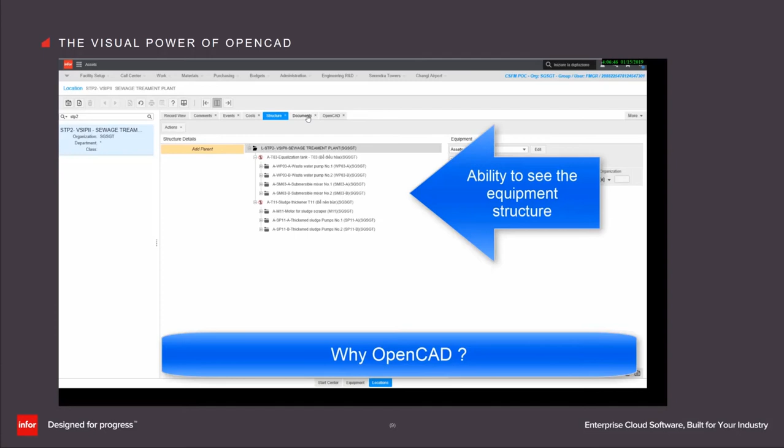Today I'll be focused on OpenCAD first and then on OpenCAD BIM. To start this presentation, I wanted to introduce a very short video about the value of incorporating drawings in EAM in order to locate the asset graphically and to see the work order condition as well. Let's start watching this video, which allows you to understand how easy it is to associate the drawing with your component. OpenCAD uses your AutoCAD drawings as they are.

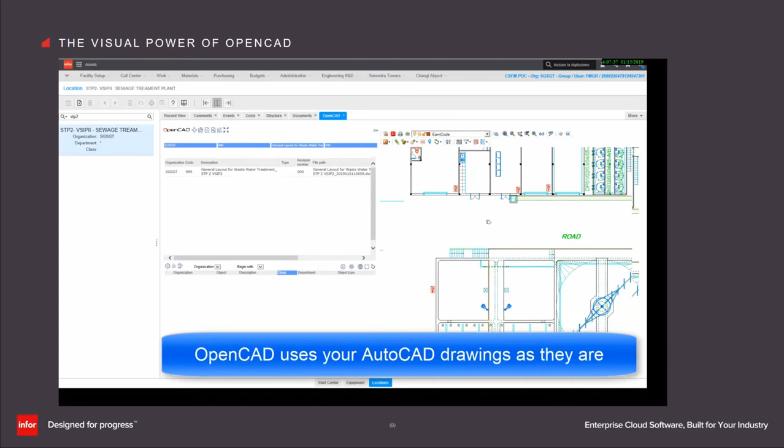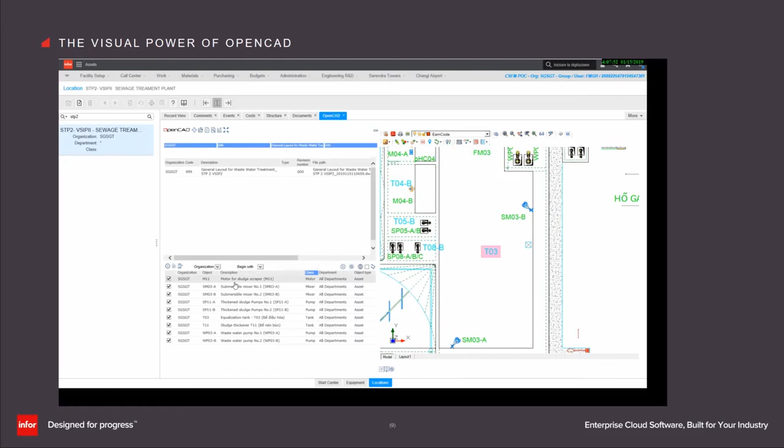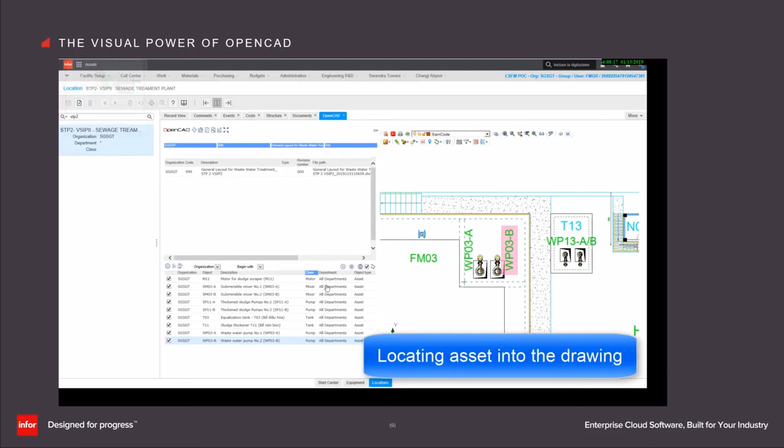Basically you can see the drawing just as having AutoCAD inside EAM. You can also take advantage of tagging your component in the drawing, and then search objects from the EAM database. You can run queries based on EAM data. In this example, you can locate your asset into the drawing, differentiating them based on the EAM classes, for example.

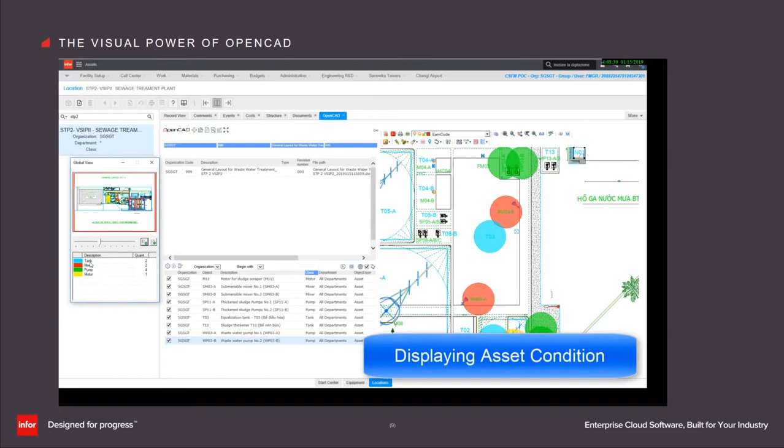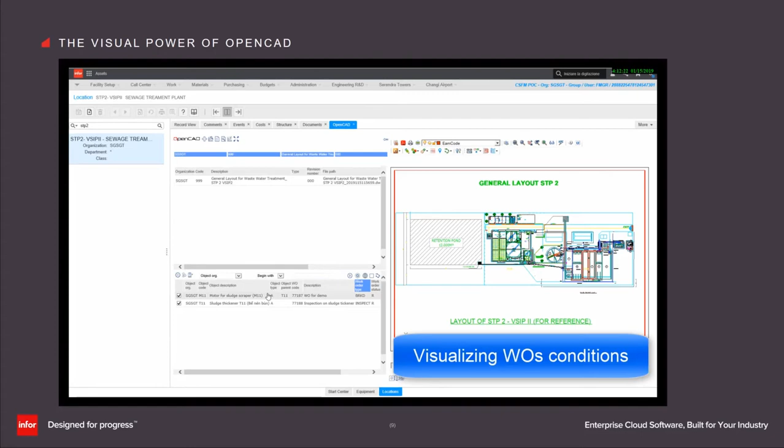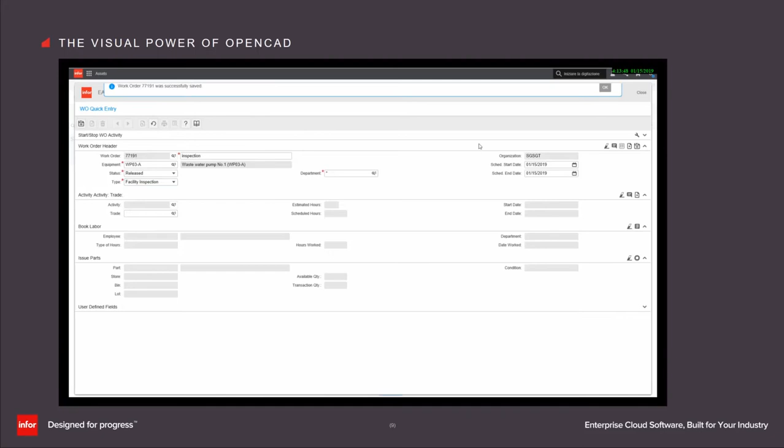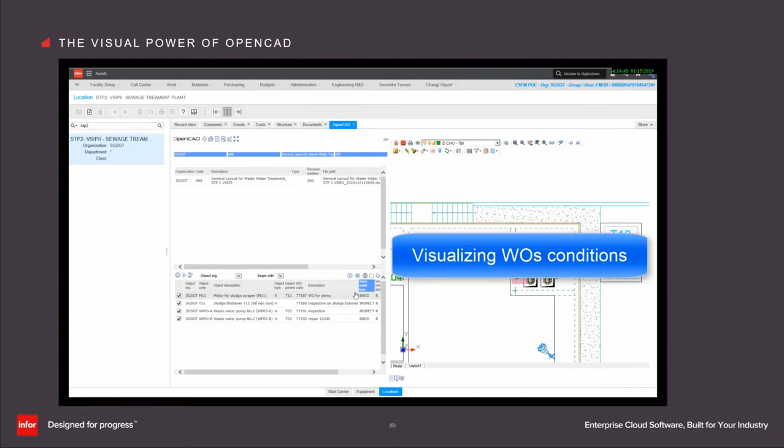This is the display asset condition capability, which allows you to have a color-coded result. Even more importantly, we can use the query for locating work orders, and then easily search certain equipment. You can use the right-click option for creating work orders. As you can see, we created the first work order, and now we're creating a second one with the quick work order way. Those work orders have different work order types, so we're able to display the work order condition, and the two different work order types have been colored differently, which is extremely important for locating your work order.

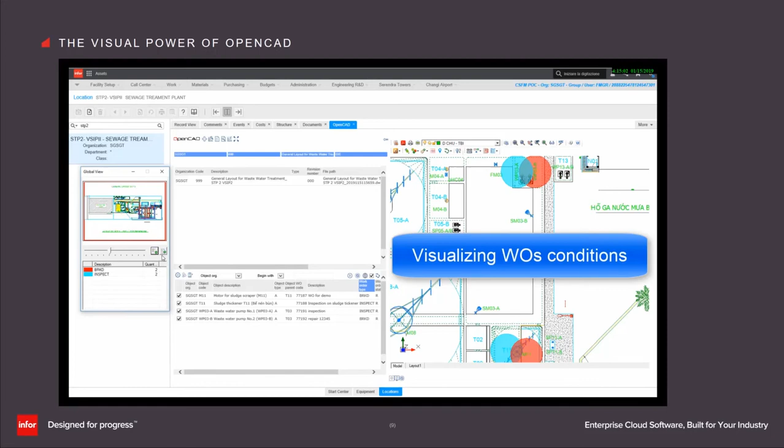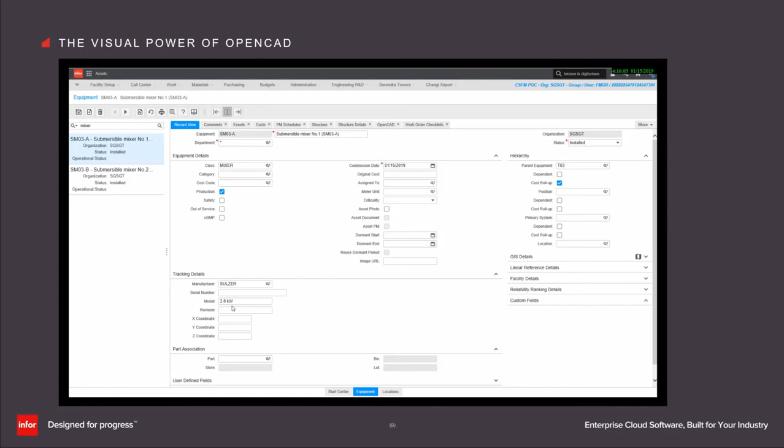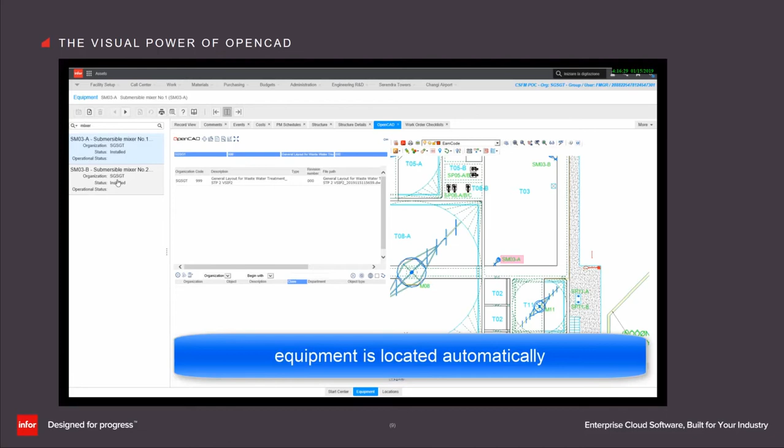Now let's start from an existing equipment. You can understand the data, and by clicking on the OpenCAD tab, you can jump immediately to where the asset is located in your drawing. Let's search for that particular mixer, and you can see where the object is located.

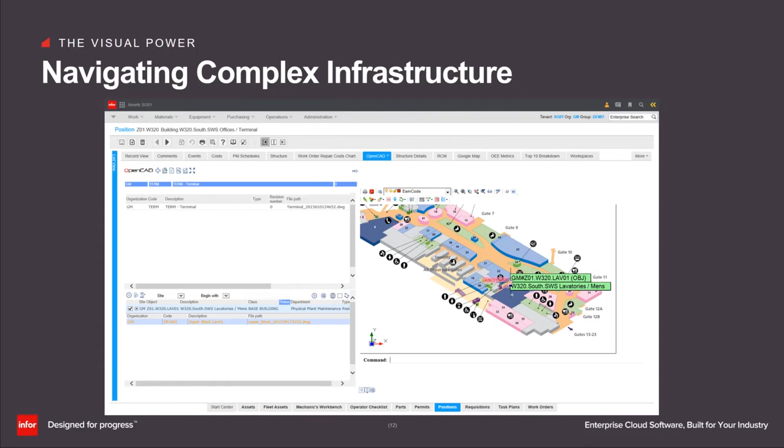So the question is, how does a visual EAM help? I'll go through a few examples to touch base with you guys about the value of having a visual EAM. Navigating complex infrastructure is key, so associating your drawings within EAM and using them for drilling down from the top to the desired equipment is now possible. But again, what about navigating complex assets?

Combining the tabular data of EAM with the visual components of OpenCAD helps bring about the very best in both worlds, such as work transactions, condition data, and inspection.

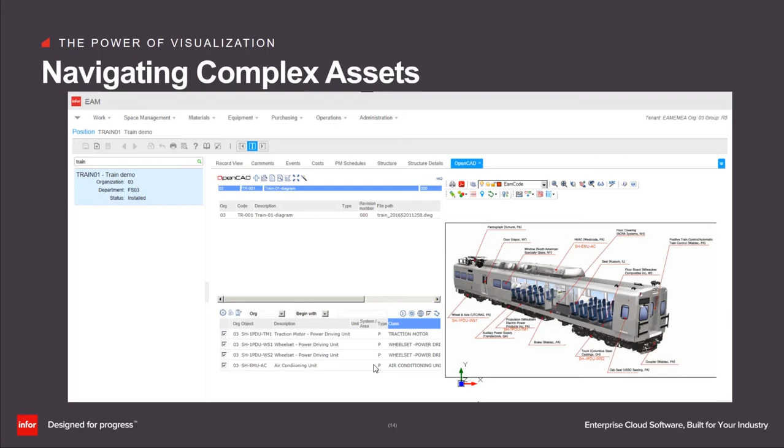It's nice to see that we can visualize quantitative data, like condition ratings, and qualitative data, like survey results, in a drawing, illustrating how we can help customers more intimately understand their aging infrastructure. Finding data built out in EAM, they can be seen in OpenCAD, so the thematic condition of why the equipment is degrading the way it is can be understood.

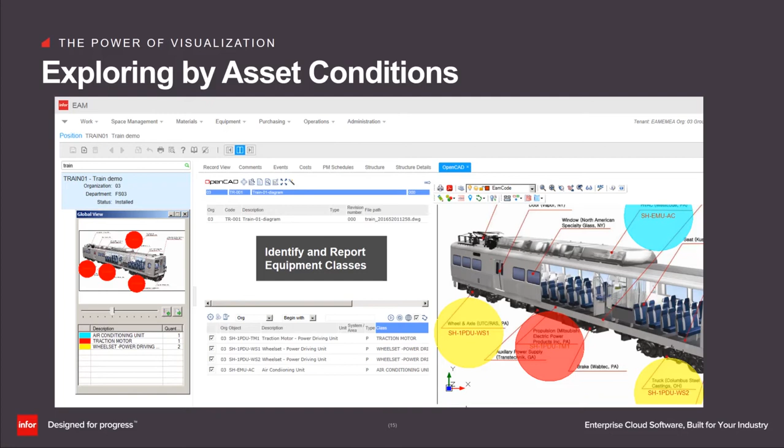Our EAM tracks everything you own, lease, and rent, and makes the data visible to you in different forms. It is really nice and effective, but it can be time-consuming as well. So navigating your facilities from a campus level down to a building floor and then locating the room is now very easy and super fast with EAM OpenCAD.

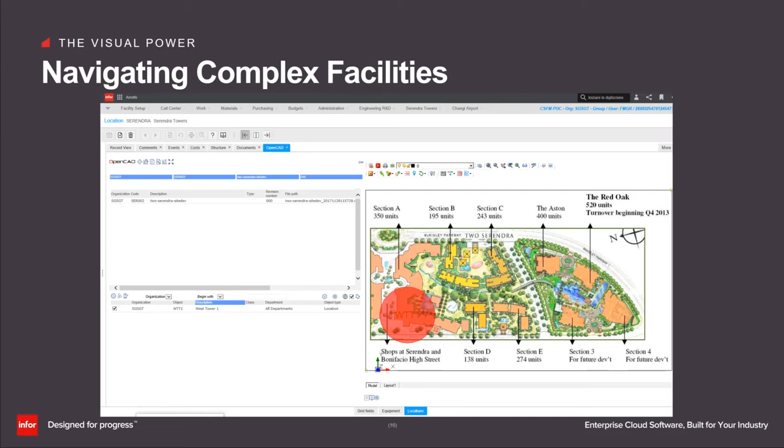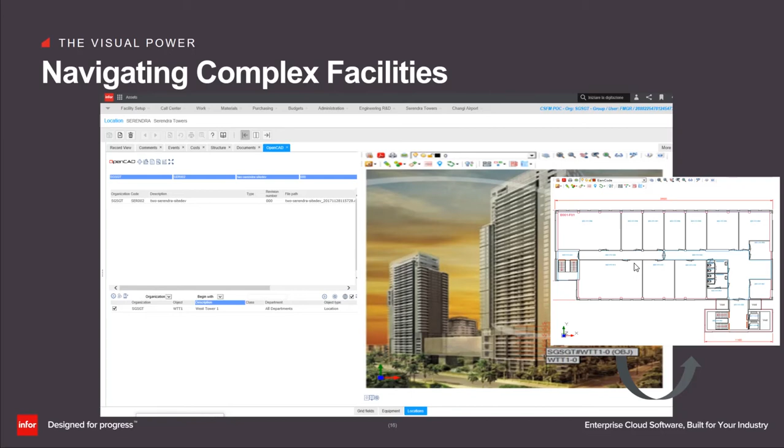If you click on this building circle here, you can jump to the second level of the drawing, which represents the building facade, where you can find the tag for going to the floor plan associated with it. That's the final step of discovering the third level of the drawing and accessing the floor plan you want to explore with EAM.

The benefit of exploring the floor plan graphically is great for different reasons. For example, we can differentiate objects based on any of the EAM data. We can also use the graphic search for locating work orders and then setting the color for displaying a work order condition, as we already saw in the previous example. In both cases, we can print out the result using the PDF report capability of the product.

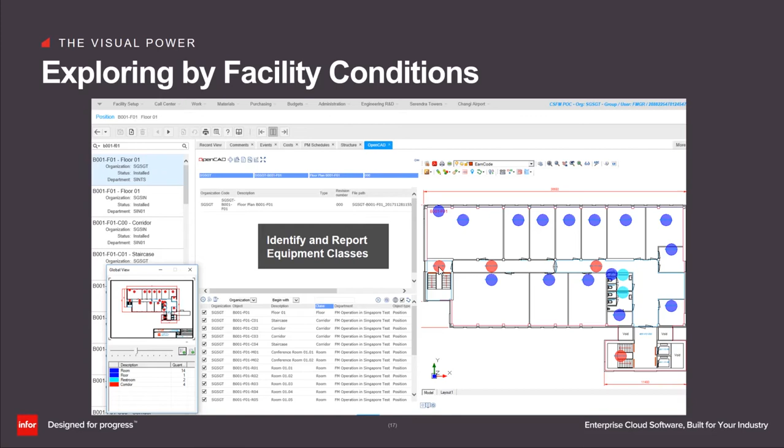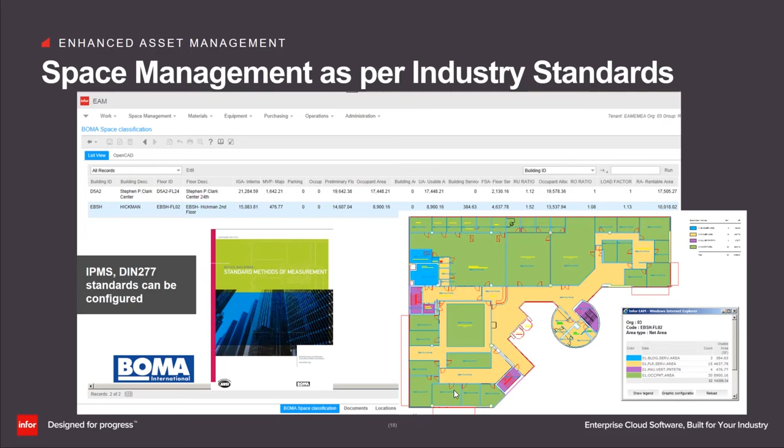Space management is part of the visualization tool, which is extremely important. We can set up and adopt industry standards for measuring office buildings. EAM and OpenCAD can be configured accordingly. It was recently certified by the Facility Management Association in Germany, EAM and OpenCAD together, which is extremely important for us. I'm very happy and proud of that.

Space planning is considered the foundation to initiate the space chargeback strategy. Identifying who occupies a space, or if spaces are empty, is mandatory for managing your buildings more efficiently. Making the result visual helps. Seeing is believing.

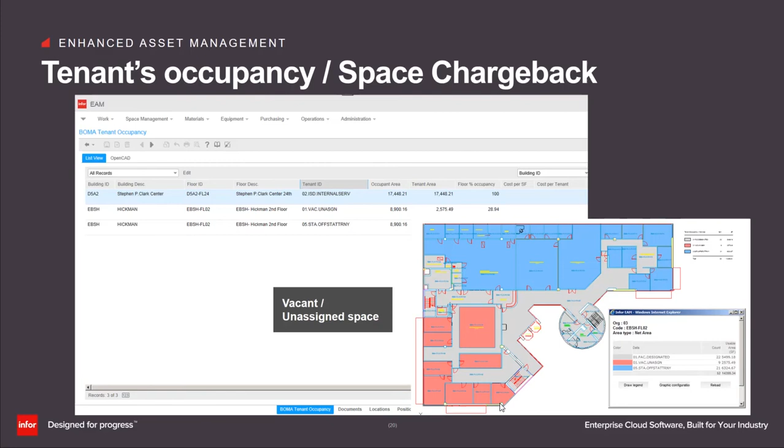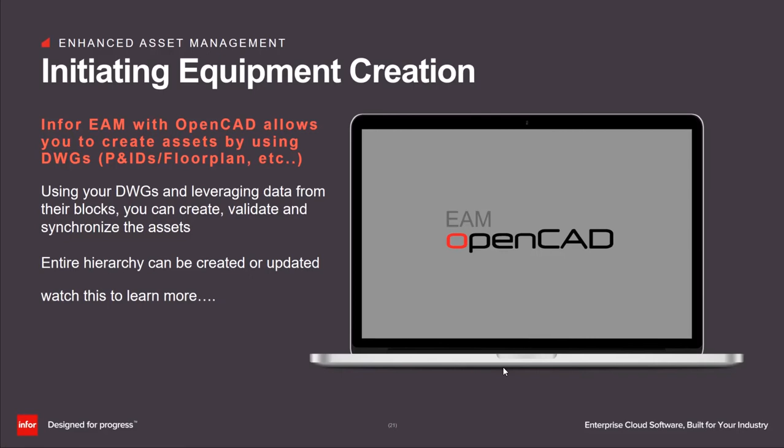One of the most interesting benefits of incorporating your drawings might be the way of creating or initiating equipment creation using your drawing. That's really nice. It is part of the OpenCAD product right now. So let me explain how the system works.

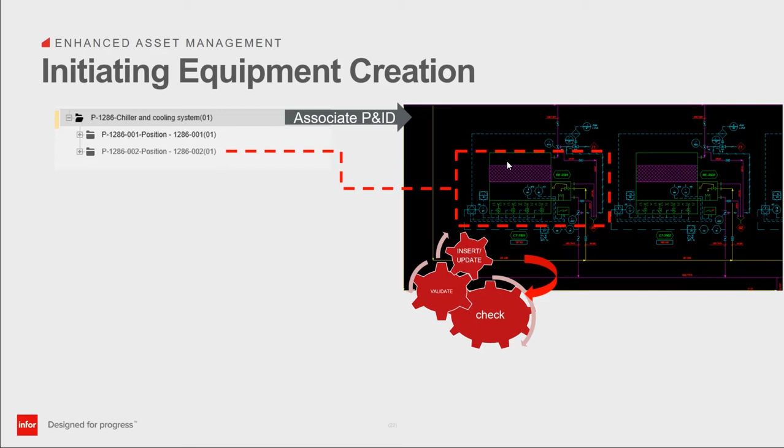You can start from the top level of your hierarchy. In this case, we are not talking about facilities, we are talking about P&IDs and asset and position hierarchies. We can associate the P&ID drawings here, and then by incorporating the drawing, we can run the inventory procedure, which is part of the OpenCAD product. Then we can select the entire content of the drawing, or just a part of it, for creating the objects and the structure accordingly, which is great.

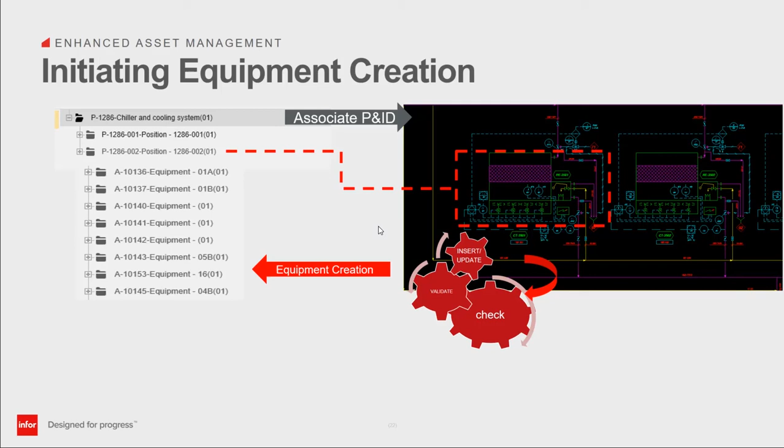Not just for the first creation, but even for making changes to your infrastructure, because EAM and the drawings are totally integrated thanks to EAM and OpenCAD. So, for example, if you start a phase of making changes in the drawing, and suppose you want to remove 3 components from the drawing, you can do it, and then run the inventory procedure again.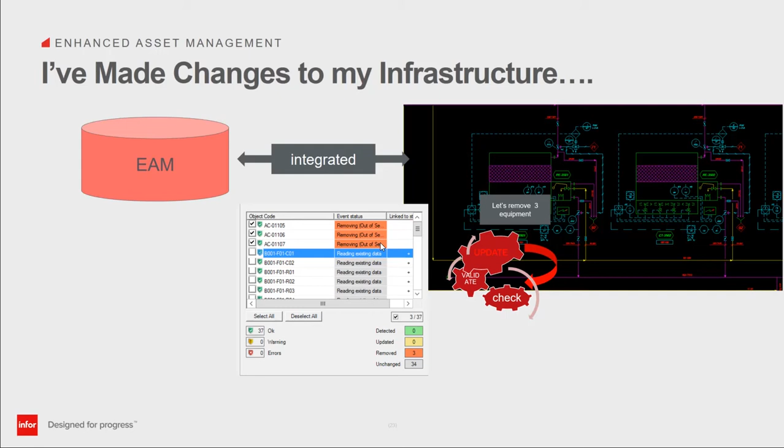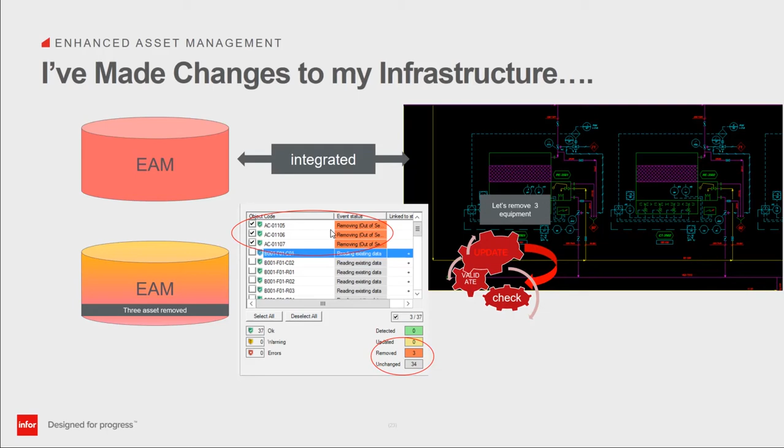The procedure will recognize that the 3 objects are not present in the drawing anymore, but they are still EAM assets, and then allows you to set the 3 different components as out of service. As you know, we cannot erase or delete an asset from the database, but you can change the status accordingly. So finally, accepting this process, the EAM asset will be changed, removing 3 components from production to out of service.

Not just floor plan drawings, but we were mentioning also P&ID drawings, which are extremely and commonly used in your infrastructure. Here we can say that even the P&ID drawings come into play in a different way. Identify and report deficiencies is now easier. Make your drawings part of EAM queries for accurate analysis, showing a visual result. It's also important to say that the color code result doesn't pertain to the drawing, but pertains to EAM. It is the EAM function that brings the color on top of the drawing.

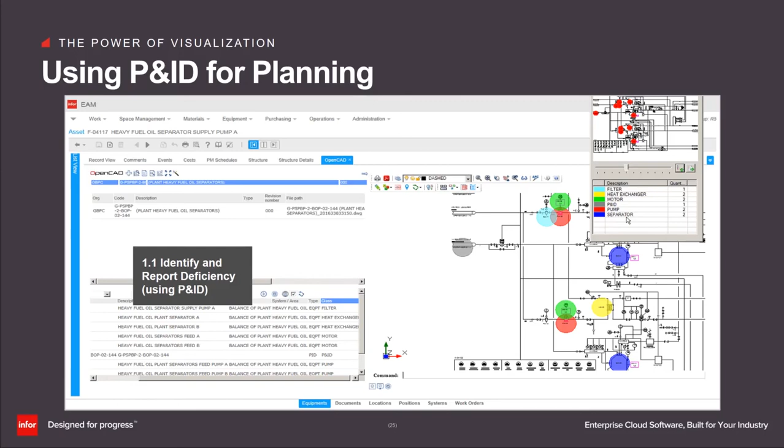So you don't have to make changes in the drawing from time to time. That's really important.

Safety is always a top priority, so making permit to work visual makes absolute sense to me. The permit requester checks on a geographical overview, which is the permit to work dashboard. Whenever there are other permits already planned for the same asset at the same time, the overview also shows permits planned, plus the permit type, hot and cold.

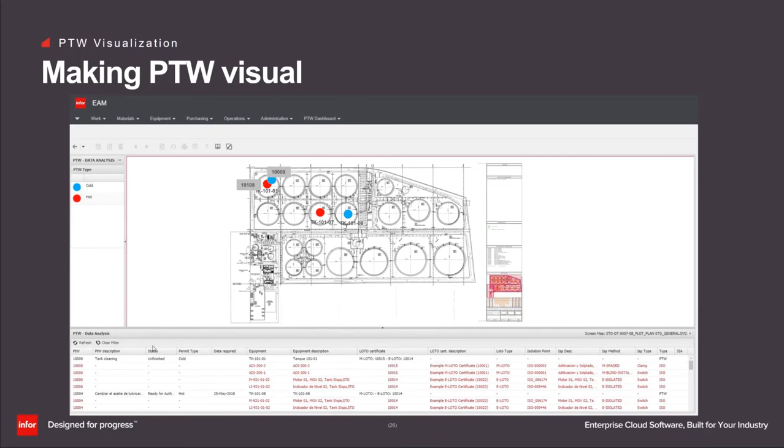Already planned permits in status ready for authorization can be opened from the screen to view permit details, which is possible by clicking on the record, or even clicking on the hyperlink that shows the permit to work. But wait, there is something more. If you click on a certain permit to work, the map interacts with the LOTO isolation points and safety zone where the permit work will take place, which is essential for managing safety more efficiently.

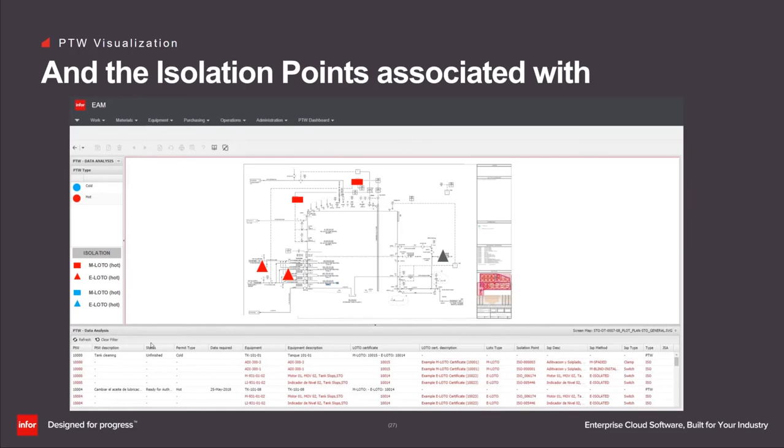Now we are talking about the EPC, which stands for Electronic Part Catalog. I will go through several examples here to show how EAM and OpenCAD allow you to create parts within EAM by using a PDF document provided by your supplier.

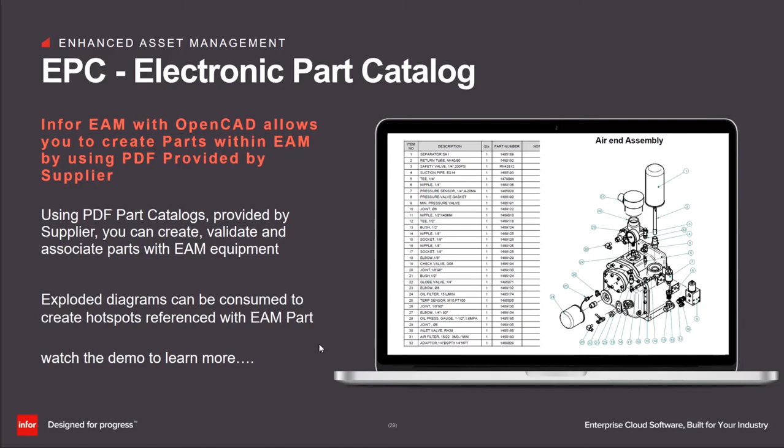So adding or associating parts in EAM via the Electronic Part Catalog. This is the step by step.

We start from importing a PDF which normally contains different pages. You have the ability here to select your desired page. Normally this Electronic Part Catalog contains both a part list and exploded view. And so the ability of the system is to discover the entities inside the part list, and then you can

take advantage of reading those data for creating parts in EAM. But first of all, we want to make sure you are able to validate this process. So this table is a user-defined table which allows you to complete your validation process. And from here you can invoke the Flex SQL, which is provided out of the box, in order to create

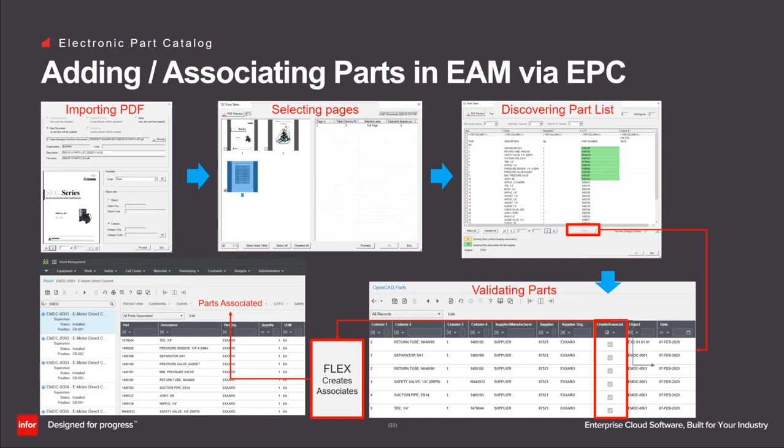the objects, the parts within EAM, and to associate those parts to the equipment from where you started this process. The second part of the solution allows you to use the exploded view for managing work orders and for being able to have your material list visible here, from which you can select each of the parts that you already created in EAM for doing the planning or for issuing the parts from the store.

And once you completed this process, you have the ability to check out the process, and all the transactions will be provided to the parts tab of the work order.

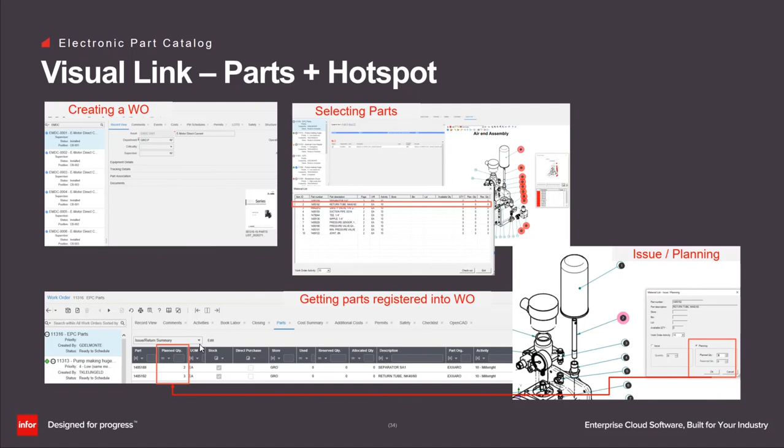All right, let's talk a little bit about building information modeling integrated with Infor CloudSuite EAM.

Building information modeling is a broad term that describes the process of creating and managing digital information about a built asset, such as building, bridge, highway, tunnel, and so on. In my opinion, there are a few key points to sharpen the benefit of adopting the BIM technology.

For sure, because it contains data that can be accessed and exported for other uses during the lifetime of the building, so especially for facility management and operation.

It is an open digital data sharing for transforming the design, delivery, and operation of tomorrow's asset. And to me, open and shareable information unlocks more efficient, transparent, and collaborative ways of working throughout the entire life

cycle of the built asset. Above all, BIM facilitates collaboration among all stakeholders, from early design to the operation and maintenance, and even to the decommissioning phase, and thereby holds out the promise of large efficiency gains.

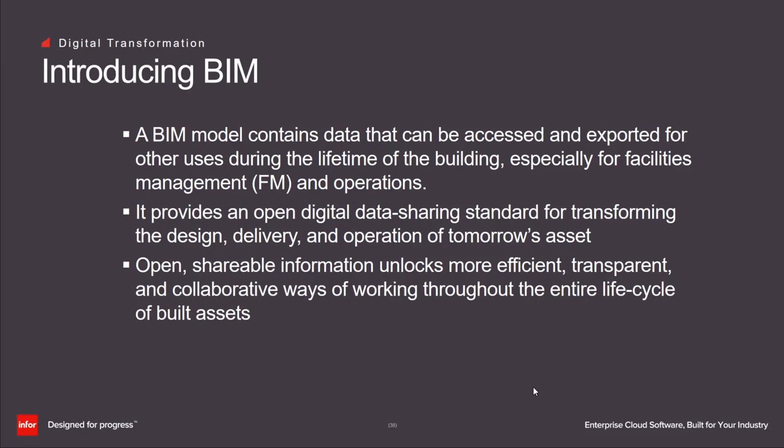All stakeholders can contribute information to and extract information from the central model by providing a lifelong view of construction projects, including the TCO. It offers owners great benefits in the commissioning and operation phase and enables new business models, particularly in the asset management area, which is, by the way, where OpenCAD BIM comes into play.

It is now available in the EAM offering, and why is OpenCAD BIM good for me? There are a few key points I would like you to focus on here.

The first is the ability to bring BIM models within EAM. The second is ingesting BIM metadata for creating assets. The third is empowering work planning and execution.

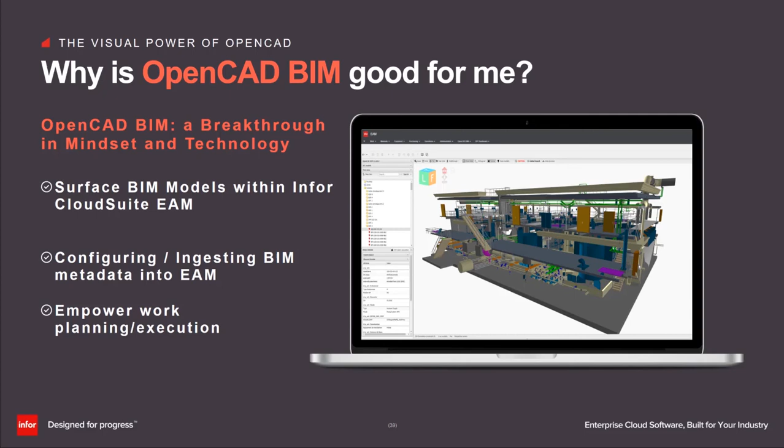So, how does the BIM model work within EAM? Basically, we are using the IFC, the industry foundation classes. It's a standard, fully open and international, for exchanging data in the BIM methodology.

And this is the reason why we are 100% compliant with all BIM platforms, and so we can integrate models coming from Revit, Bentley, or ArchiCAD. Infor EAM has an OpenCAD BIM utility which allows you to import and upload the IFC model within EAM, allowing you to surface the BIM model within EAM

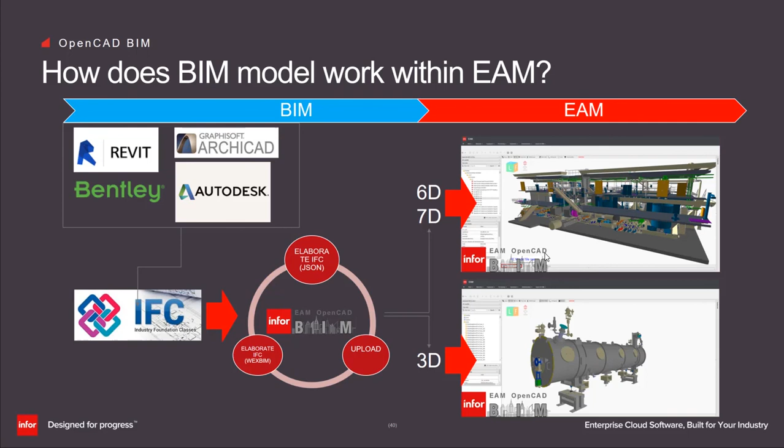I'm very excited to introduce a few of the many benefits of using the visual interface of OpenCAD BIM for Infor CloudSuite EAM.

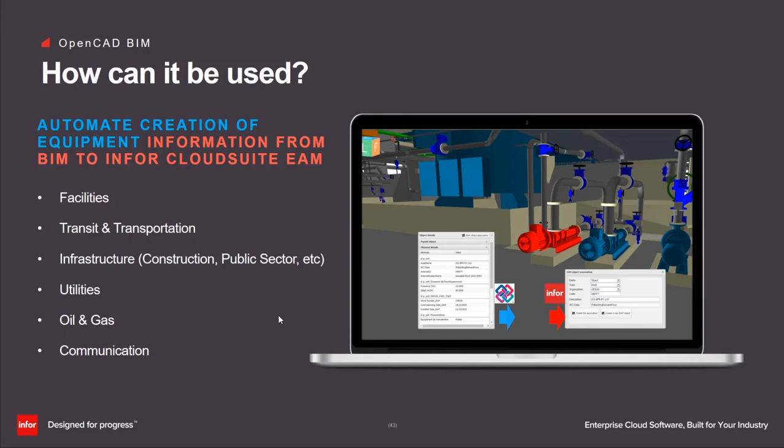The first is, as I mentioned before, the out-of-the-box feature to associate and create EAM entities with BIM components, consuming their data.

But even more interesting is understanding the physical and functional relationship between equipment. I mean, this is a dream that comes true.

Just by selecting an asset, you may have the ability to see how it interacts with the physical, so the space associated with it, or even better, the functional, which is normally the system, and then understanding how it operates.

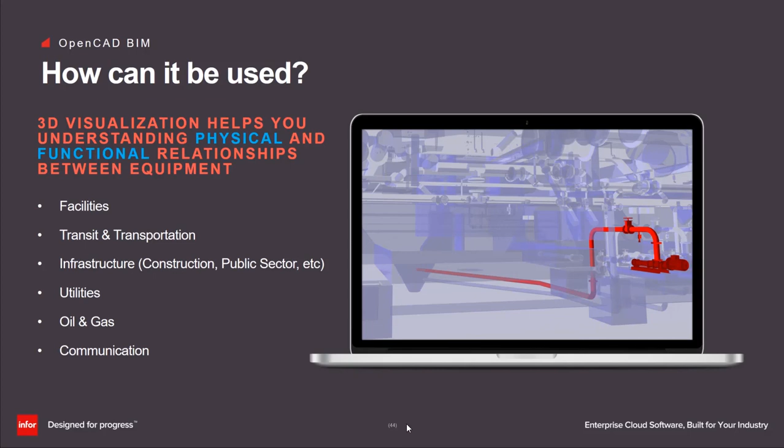Wouldn't it be great to navigate your complex infrastructure with the ability to eliminate visual barriers and discover what happens behind the wall?

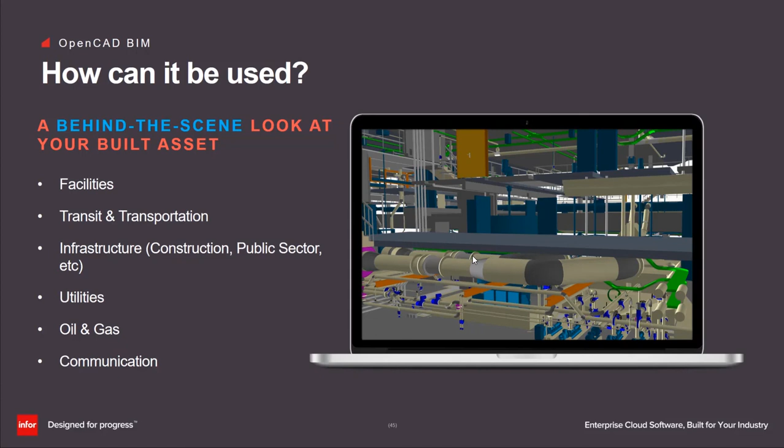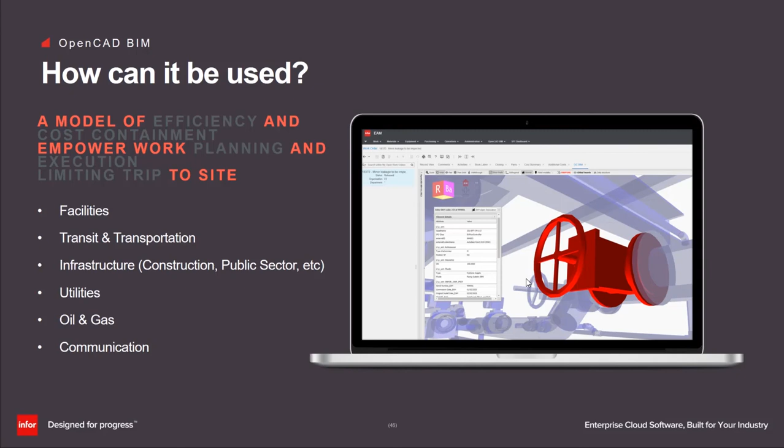A model of efficiency and cost containment: starting from a work order, from a given piece of equipment, you are capable of showing the location of the equipment, showing adjacent similar equipment in the model, displaying open and pending work orders on adjacent equipment, and empowering work planning and execution, but also limiting trips to site and enabling work requiring similar skills, tools, and paths to be grouped and executed at once.